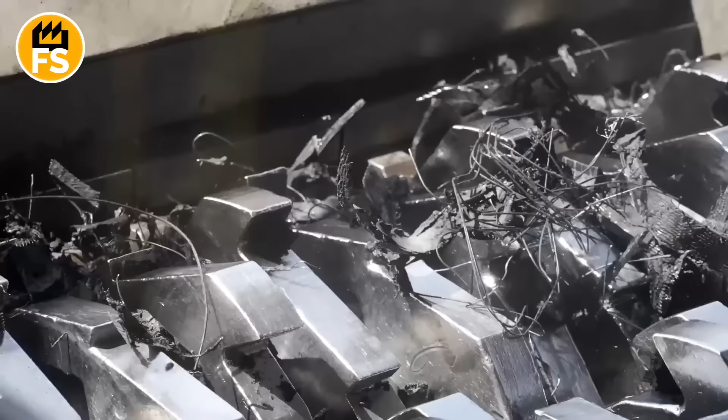Every year, over 1 billion new tires appear in the world, and just as many used ones end up in landfills. In the United States alone, over 250 million tires are recycled annually, saving the planet from mountains of trash. But where do these black rings, which have served their thousands of miles, disappear to?

They don't just vanish, they go through fire, steel, and the grindstones of machines to be born a second time. And the most exciting part, we don't even realize that we walk on their second life every day. Stay until the end, because there I will reveal a secret that will forever change your perception of an ordinary tire.

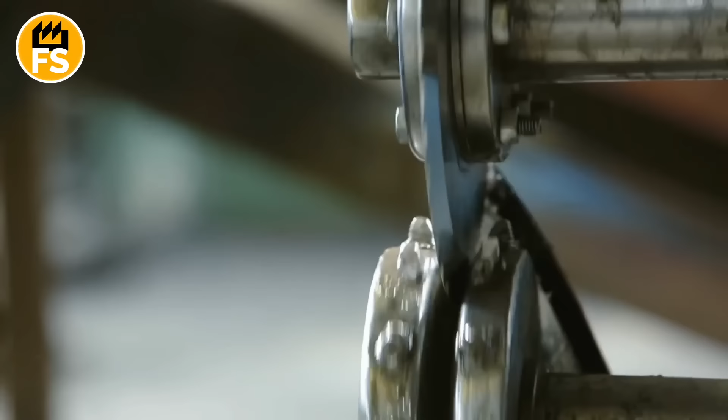So today, we're heading to a cemetery. A car tire cemetery. Acres of land, piled high with mountains of black rubber rings. These are the silent veterans of the roads, who have driven their thousands of miles and now lie here, seemingly unwanted by anyone. But this is not the end of their story. It's just the beginning of their amazing reincarnation.

We will trace how these worn, dirty pieces of rubber go through a series of brutal yet high-tech trials to be reborn as the soft, resilient heart of a modern sports stadium. This is a story of how the roar of the road turns into the quiet whisper under the feet of athletes.

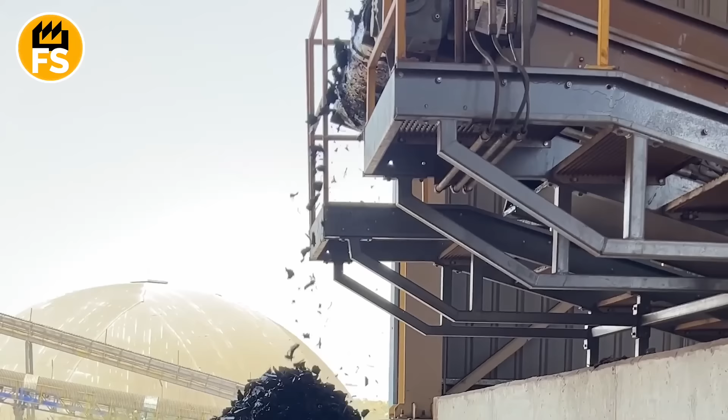Americans have learned to give a second life to the vast majority of tires. The recycling rate for old tires in the United States is now over 85%. This is one of the highest rates for any consumer product.

This means that over 250 million tires annually avoid the landfill and are sent for rebirth. Some of them are burned as highly efficient fuel. Some are used in civil engineering, but a significant and ever-growing number are turned into that very rubber crumb.

In this tire cemetery works a machine that looks like a steel Tyrannosaurus. This is an industrial shredder. A huge loader grabs a whole handful of old tires and throws them into the steel maw of this machine.

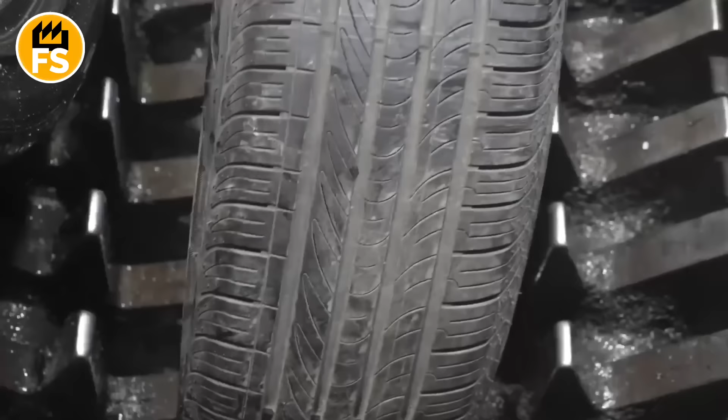Inside, 2 massive shafts with thick, sharp hooks rotate with a deafening screech. They grab the tires with relentless force and with an incredible crack, tear them into pieces. There is no delicacy here. The shredder's task is simply to break the integrity of the tire, turning it into coarse pieces the size of a palm. At this moment, the first important release occurs.

Inside each tire is a steel cord, a strong frame of steel wire. During the tearing, this cord is released, turning into a shiny web of steel threads, mixed with rubber pieces. This chaotic mixture of rubber and steel moves further along the conveyor.

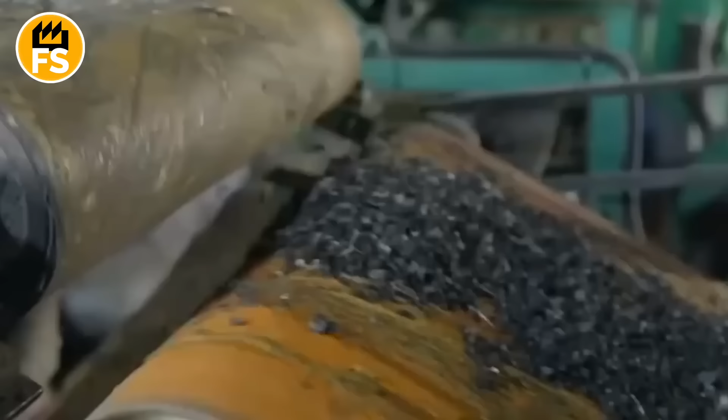And here, an industrial, powerful, huge magnet comes into play, rotating above the stream of shredded material. It, like a refrigerator magnet, but 1,000,000 times stronger, pulls all the steel threads from the rubber mass. With a screech and a clang, the steel cord sticks to the magnet and is dropped into a separate container. This steel will then be sent for remelting, and our cleaned rubber continues its journey.

But it is still too large and coarse. The next stop is the granulator. This is something like an enraged coffee grinder the size of a car. Inside, sharp knives rotate at a huge speed, grinding the large pieces into a finer fraction, the size of a fingernail.

During this process, another component of the tire is released, the textile cord. These are nylon or polyester fibers that gave the tire additional strength. These light, fluffy fibers need to be removed. For this, the rubber granules pass through a system of vibrating screens and air separators. Powerful streams of air literally blow away the light textile fluff, leaving only clean, heavy rubber granules.

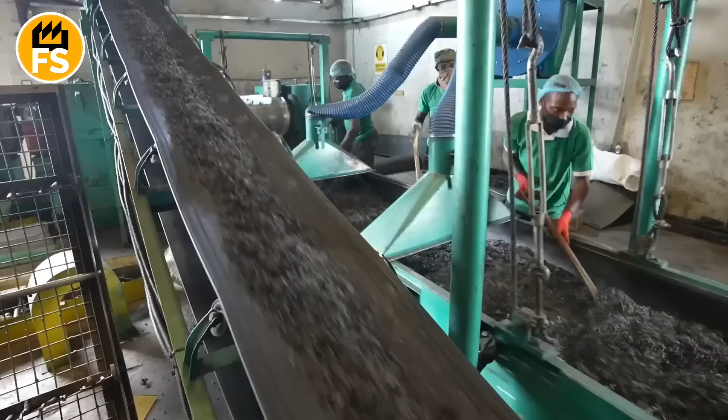Now, we have a clean, but still quite large material. To become a stadium covering, it needs to be turned into crumb. For this, the granules are sent for final grinding, often in so-called cracker mills. These are 2 massive grooved steel rollers that rotate towards each other at different speeds. The rubber granules, falling between them, are not so much cut as they are torn and ground into the smallest particles.

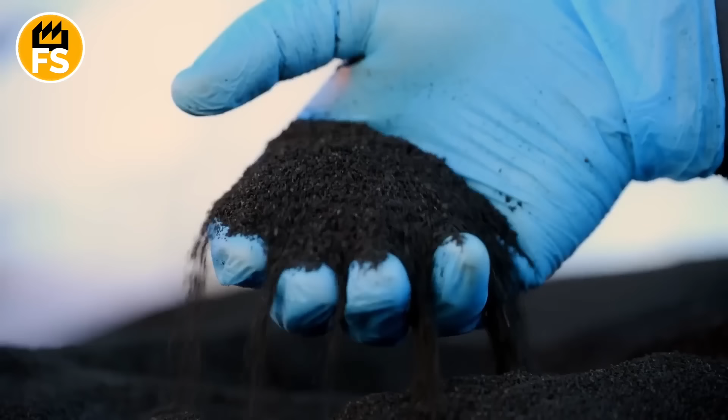As a result of this process, we finally get what it was all for: rubber crumb. This is a uniform, free-flowing mass, similar to black caviar or coarse sand, where the size of each particle is only a few millimeters. This crumb is carefully sifted to guarantee perfect size uniformity and packed into huge bags, weighing a ton each. Its journey from a dirty tire to a clean, high-tech raw material is complete.

And now let's move to the place where this black crumb will find its true calling, to the construction of a new stadium. Workers roll out huge rolls of artificial turf on a perfectly leveled gravel base. This isn't just a green carpet. It's a base with long, soft polyethylene blades of grass sticking up.

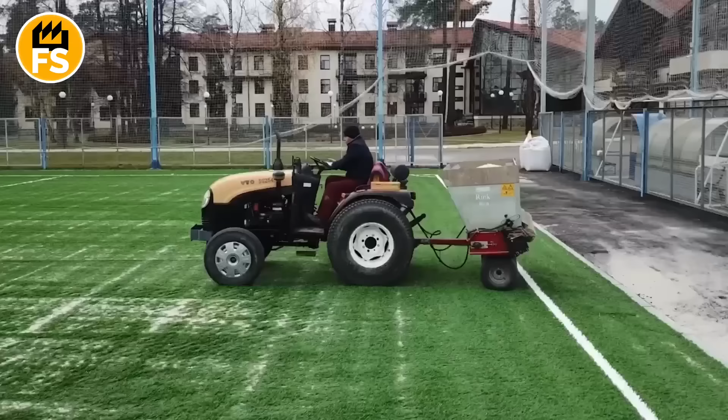But for now, they look sad and limp, pressed to the base. For them to stand up and look like real grass, they need support. And here, a special machine, similar to a large fertilizer spreader, drives onto the field.

A process called infilling begins. First, the machine evenly spreads a layer of fine, rounded quartz sand over the entire field. It is heavy and settles at the very base of the carpet, acting as a ballast so the turf doesn't shift, and helping to stabilize the blades of grass.

And following the sand, our main hero is poured onto the field: black rubber crumb. The machine just as evenly distributes it over the entire surface. And this is where the main transformation happens.

This crumb fills the space between the blades of grass, making them stand vertically, like real grass. Secondly, and most importantly, it creates a cushioning layer. When an athlete runs, jumps, or falls, this layer of billions of tiny, resilient rubber particles compresses, absorbing the energy of the impact.

It's like running on a billion tiny trampolines. This sharply reduces the load on the athlete's joints and makes falls much safer.

The final touch is combing the field. A special machine with a huge brush drives over the turf, thoroughly mixing the sand and rubber crumb and combing them deep to the very base, making each blade of grass stand perfectly straight.

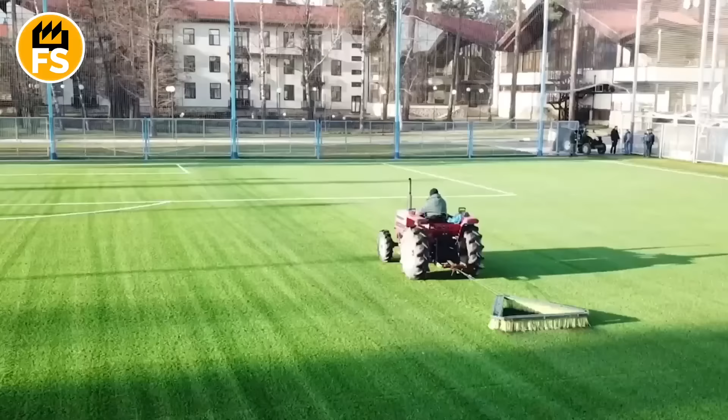And so, when the work is done, before us is a perfectly green, resilient, and safe field. And none of the players running on it may even guess that under their feet, between the bright green blades of grass, lie millions of particles of old car tires, which have completed their epic journey from the roar of the highway to the quiet, resilient covering of a sports arena, having received a second, much nobler life.

To create one standard field for American football or soccer, you need an average of 20,000 to 40,000 old passenger car tires. Just think about it. A single field completely eats a whole mountain of rubber trash.

And how many such fields are there in the country? There are now over 13,000 fields with artificial turf in the USA, in schools, colleges, parks, and professional arenas. And this number is growing every year.

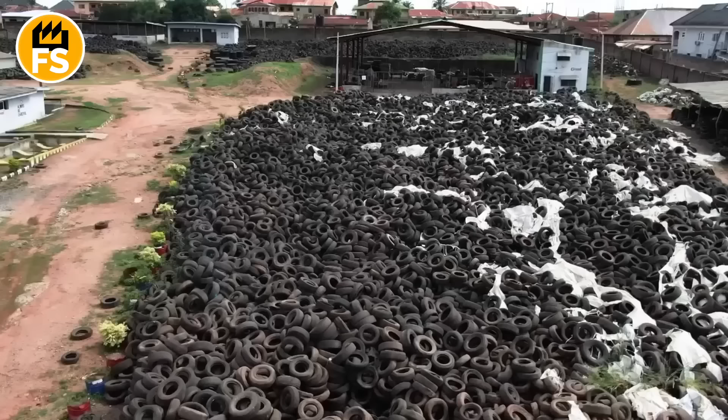And now for some simple math. If we take even the minimum figure of 20,000 tires per field, it turns out that in the coverings for sports fields across the country, over 260 million old tires have found their new home. This is almost a year's supply of all the rubber scrap that the country generates.

Natural turf is a very capricious thing. It needs to be constantly mowed, watered, fertilized, and given rest. On average, a natural field can withstand no more than 20 hours of play per week.

And a field with artificial turf? It can work 24 hours a day, 7 days a week, in rain and in heat.

And now about water. One field with artificial turf can save from 500,000 to 1 million gallons of water every year. This is the amount of water an average family uses in several years. Add to this the savings on fertilizers, pesticides, and the work of lawnmowers, and the benefit becomes obvious.

So the next time you see a bright green field, know that it's not just a place to play. It's a monument to human ingenuity that solves the problem of trash, makes sports safer, and saves precious natural resources, one old tread at a time.

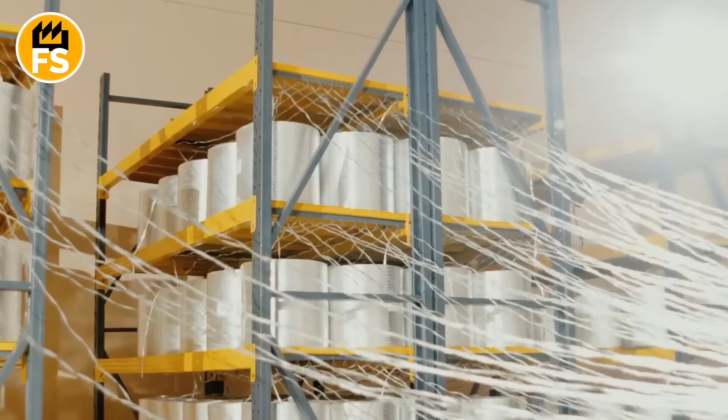Imagine thousands of glass threads, thin as a hair, combined into a single river, are transformed into a material that is already challenging steel. This isn't science fiction, but modern production of fiberglass rebar.

Every year, the world spends billions fighting rust, repairing bridges and parking garages destroyed by corrosion. But there is a solution: a composite that is twice as strong as steel, four times lighter, and doesn't even know what rust is. The market for this material is growing by 12% annually.

And today you will see how a building material of the future is born from hundreds of bobbins and a barrel of resin.

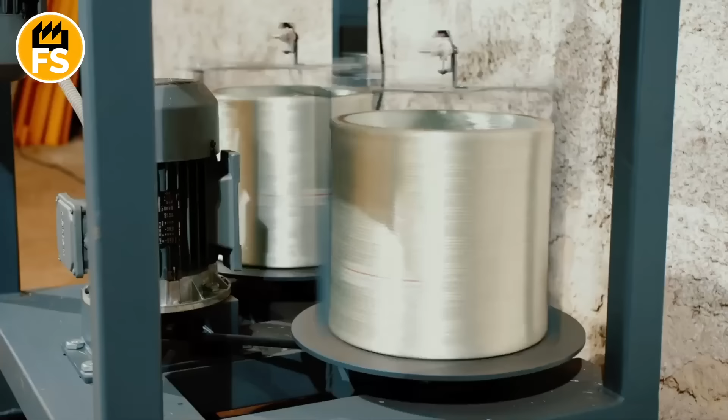It all begins at one end of a huge workshop, where a structure resembling a giant library for threads stands. This is called a creel. On a wall, several yards high, hundreds, sometimes thousands, of huge bobbins are installed in neat rows. On each of them is wound the thinnest glass thread, or roving.

This isn't the glass that windows are made of. This is a special fiberglass, produced by melting glass and drawing it through microscopic holes. The result is threads thinner than a human hair, but with incredible tensile strength.

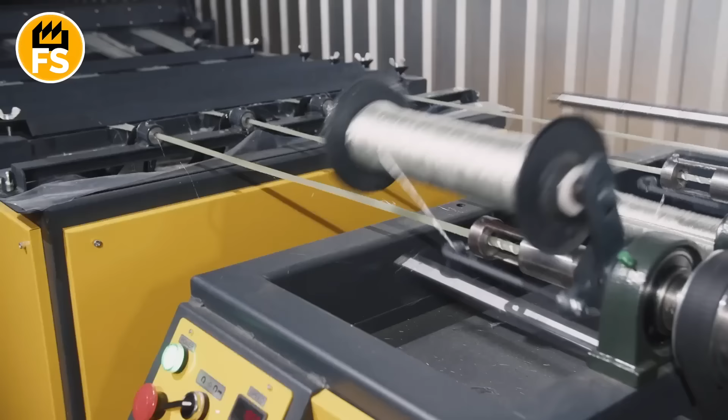They will be our skeleton, our internal army, which will give the rod its insane strength. From each of these hundreds of bobbins stretches its own separate thread, and they all gather into one thick, fluffy bundle. It's like thousands of streams merging into one large river. This dry white bundle is the soul of the future rebar.

Next, this river of fiberglass begins its journey. It passes through a system of guides and tensioning devices. This is a very important, though inconspicuous, stage. Each of the thousands of threads must be tensioned with the same force. If one thread sags and another is over-tensioned, the load in the final product will be distributed unevenly, and it will lose its strength. Therefore, the machine carefully aligns them, preparing them for the most important moment: baptism in resin.

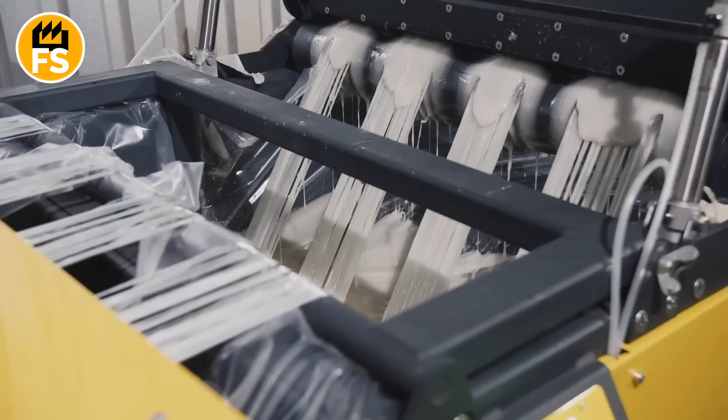The dry glass bundle is slowly immersed in a bath filled with a thick, sticky liquid, similar to honey or syrup. This is a polymer resin, our meat, that will grow on the glass skeleton. This is a complex chemical cocktail. The base is usually polyester, vinyl ester, or epoxy resin. A hardener is added to it, a catalyst that will start a chemical reaction and force the liquid to turn into a solid plastic.

Also, various additives can be added here: pigments to give color, ultraviolet inhibitors so that the rebar is not afraid of sunlight, and flame retardants for fire resistance. The task of this bath is to soak every, even the tiniest fiber. The bundle must be completely submerged in this resin so that not a single dry spot remains.

The soaked, heavy from sticky resin bundle comes out of the bath and heads to the point of its birth, the forming die. This is the heart of the whole process. Imagine a thick steel plate with a perfectly round, polished hole, the diameter of which exactly corresponds to the diameter of the future rod. The die is heated to a certain temperature.

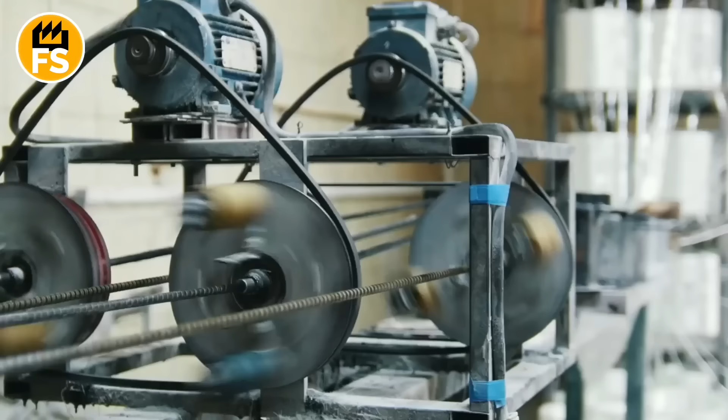When the wet bundle is drawn into this hole, several things happen at once. First, the die, like a press, squeezes out all the excess resin, leaving only the necessary amount. Second, it tightly compresses all the fiberglass together, forming a perfectly round rod. Third, the heat from the die starts the initial stage of the chemical reaction of hardening, or polymerization. The resin begins to turn from a liquid into a gel. At the exit of the die, we already see the familiar shape of the rod, but it is still soft and vulnerable.

But how does it get its famous ribbed surface to hold well in concrete? Immediately after exiting the die, while the rod is still hot and soft, a special bundle of the same fiberglass is wound onto it. A thin, resin-soaked thread is wound in a spiral on the surface of the rod, creating a relief pattern. Sometimes, for even better adhesion, fine quartz sand is sprinkled on the sticky surface, which sticks firmly to the resin. Now our rebar has not only strength, but also teeth with which it will hold onto concrete.

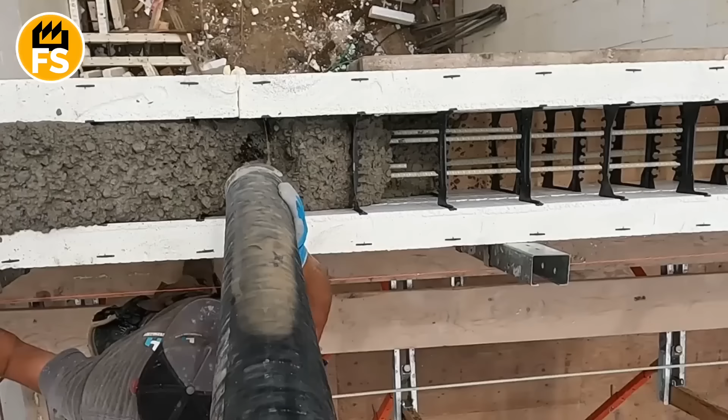The formed and wrapped rod enters the longest part of the machine, the curing tunnel, or polymerization furnace. This is a long chamber that can stretch for tens of feet, inside which a high temperature is maintained, usually 400 Fahrenheit. Here, the final transformation takes place.

This is not just drying. Under the influence of heat, the resin molecules begin to actively connect with each other, forming a strong, rigid, three-dimensional network. The liquid, sticky syrup turns into an extremely strong and hard composite material, which firmly binds millions of glass fibers into a single monolith. It's like baking a pie. While the rod slowly moves through this hot tunnel, it acquires its final, stone-like hardness.

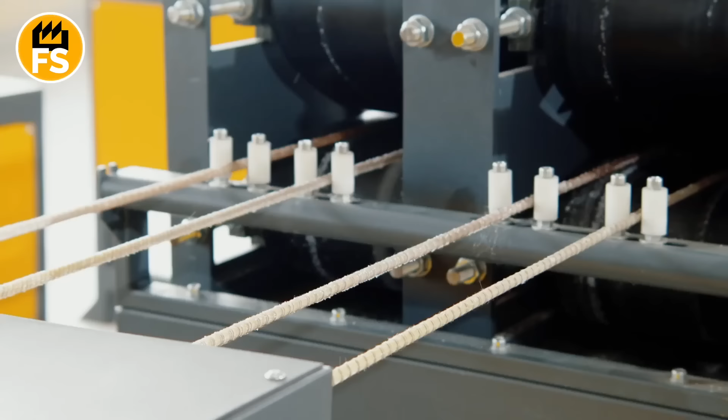But what pulls it through this whole long path, from the bobbins to the furnace? At the end of the line stands a special pulling device, which gave the whole process its name. Usually, these are two caterpillar mechanisms, similar to tank tracks, located one above the other. They gently but very firmly clamp the already finished hard rod with their rubber pads, and at a constant, precisely calibrated speed, pull it towards themselves.

It is they who create the force that pulls the fiberglass through the resin bath, through the forming die, and through the furnace. The speed of this movement is one of the most important parameters that controls the quality of the final product. And so, from the other end of this long conveyor appears an endless, perfectly even, hard and hot fiberglass rod.

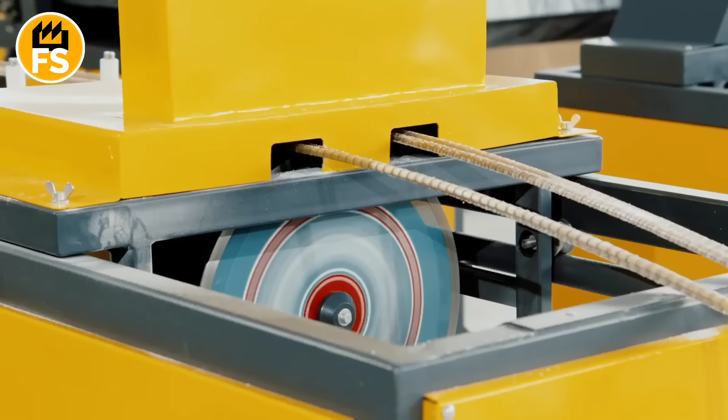The final chord is cutting. Across the line is an automatic saw. It synchronizes with the speed of the rod's movement, and at the right moment makes a quick forward movement, and with a sharp whiz, cuts off a piece of standard length from the endless ribbon, for example, 20 or 40 feet. Then it returns to its starting position, waiting for the next section to arrive.

The finished, still warm rods roll onto a cooling table, and then they are collected into bundles, tied, and sent to the warehouse. And so, before our eyes, thousands of fragile glass threads and a barrel of sticky liquid, having passed through baths, presses, and furnaces, have turned into a light but incredibly strong building material of the future, ready to challenge rust and time in the concrete jungles. The fiberglass rebar market is not yet a giant like the steel market, but it is the coolest and most daring newcomer at the party, rapidly gaining popularity.

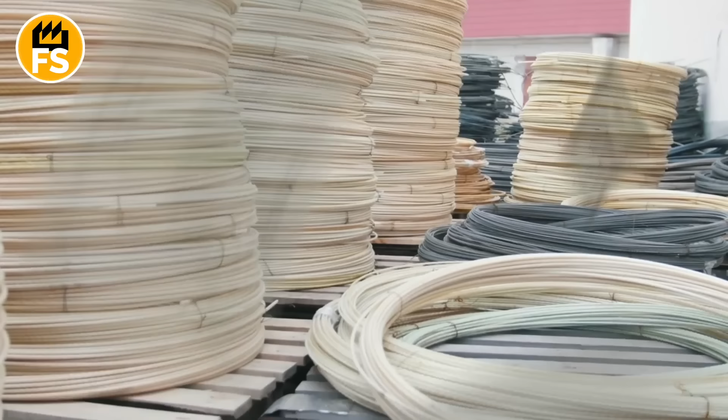The global market for this material is already valued at hundreds of millions of dollars, and the forecasts are simply insane. It is expected to grow by 10 or 12% annually. This means that more and more engineers and architects are looking at rusting steel and saying, 'Dude, we can do better.' And now about the main features that make steel rebar nervously smoke in the corner.

The first and most obvious is weight. Fiberglass rebar is about 4 times lighter than steel of the same diameter. Sounds boring? Now imagine it in real life. Imagine a truck carrying rebar to a construction site. It can bring 4 times more length of fiberglass rebar in one trip than steel, because it is limited by weight. Or, for the same amount, it will take 4 times fewer trips, which saves fuel and time.

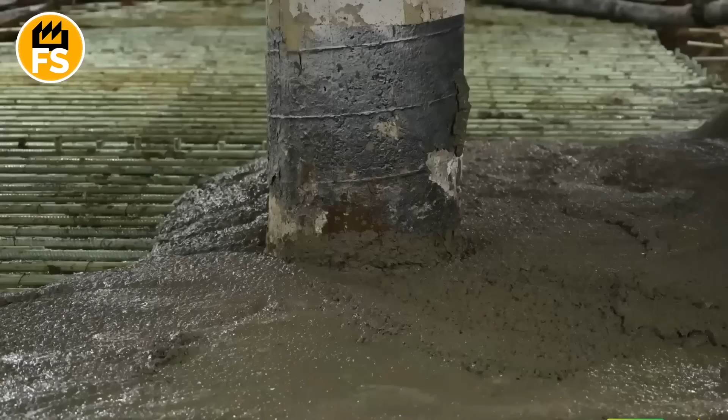On the site itself, 2 workers can calmly carry whole coils or bundles of fiberglass rods, whereas a crane is needed to move steel. This is a colossal saving on logistics and labor.

Second is strength, and here fiberglass simply enters the ring and knocks out steel in the first round. Its tensile strength is about twice as high as that of standard steel rebar. So to break a fiberglass rod, you need to apply twice as much effort as for a steel one of the same diameter. This means that in some structures, rebar of a smaller diameter can be used, saving even more weight and volume. It's like comparing an ordinary rope with a climbing rope. At a smaller thickness, it withstands much greater loads.

But the main trump card, the real superpower of fiberglass, is its war with rust. The main enemy of any reinforced concrete structure, from bridges to parking garages, is not the load, it's rust. Water and salts penetrate through micro cracks in the concrete, reach the steel rebar, and it begins to rust. Rust increases in volume and literally tears the concrete from the inside. Annually, the United States spends billions of dollars on repairing bridges, parking garages, embankments, and tunnels destroyed by rebar corrosion.

And fiberglass? It just laughs in the face of rust. It is chemically inert, completely indifferent to water, salt, acids, and alkalis. This means that the service life of the structure increases dramatically. A concrete structure reinforced with steel is designed for more than 50 years. And a structure with fiberglass rebar is calmly designed for more than 100 years.

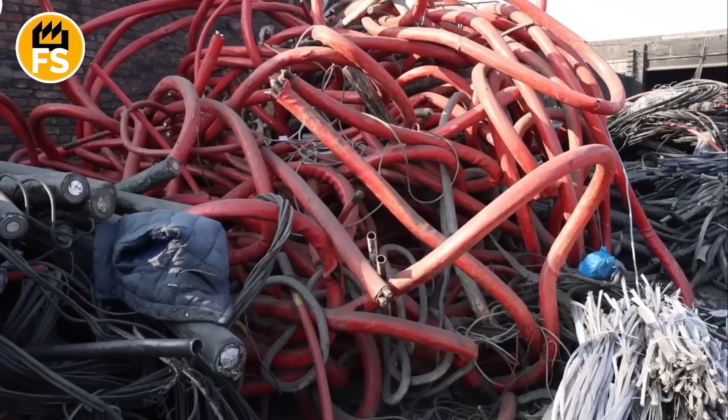It all starts at the huge warehouses of recycling plants. Thousands of pounds of various copper scrap flock here. Thick power cables from industrial sites lie next to thin wires from household appliances. Old transformers are neighbors with remnants of construction wiring. Each element has its own story, but they all share one thing: they are ready for a new life.

The first stage of recycling is careful sorting. Experienced specialists separate the scrap by type and degree of contamination. Clean copper wire is separated from insulated cables. Thick industrial cables are separated from thin household wires.

This is a critically important step, as different types of scrap require different approaches to recycling. The next stage is mechanical cleaning, a true art of modern technology.

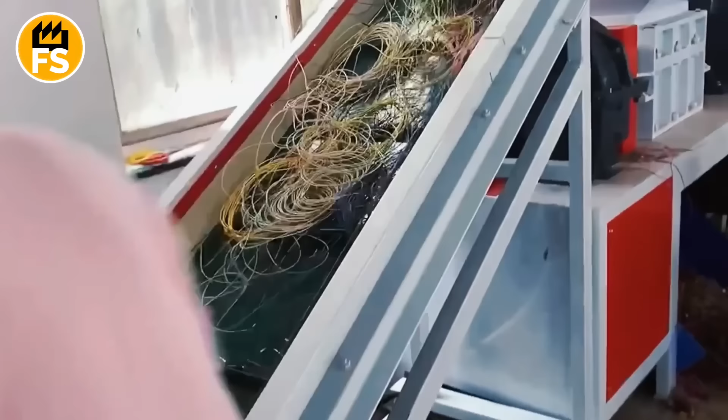Powerful shredding machines cut the cables into fragments 2 or 3 inches long. Special separators use the difference in material density, as copper is heavier than plastic and rubber, making it easy to separate. Vibrating tables and air currents finally clean the copper fragments of insulation remnants. The output is relatively clean copper pieces, but this is just the beginning.

The real magic begins in the melting shop. Huge induction furnaces heat the copper to a temperature of over 1,984 degrees Fahrenheit, the melting point of copper. The metal fragments gradually turn into a red-hot, almost golden liquid.

This sight is always impressive. Hard, cold pieces of metal become a living, pulsating mass. But temperature is just a tool. The main action happens at the molecular level.

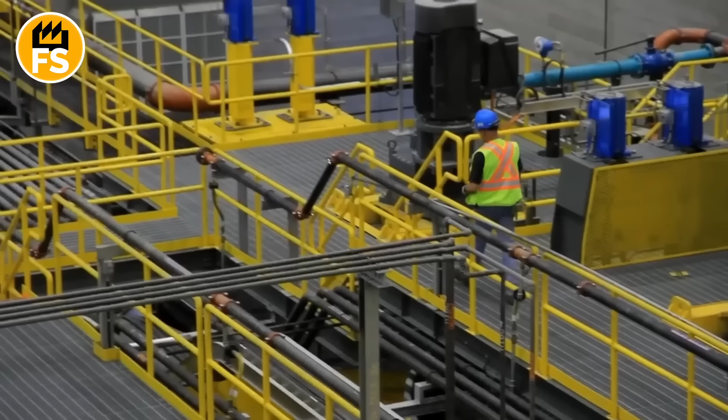During melting, impurities behave differently. Some float to the surface as slag, others dissolve. Master metallurgists carefully control the process, skimming off the slag and adding special substances called fluxes, which help remove unwanted elements. The first refining is complete, but this is not the end.

The molten copper is poured into special baths for electrolytic purification. This is the most precise stage of the entire process. An electric current of several thousand amperes is passed through the melt. Under its influence, residual impurities—iron, nickel, zinc, lead—migrate to the electrodes and are removed from the melt.

Electrolysis lasts for several hours. The temperature is strictly controlled between 2,100 and 2,200 degrees Fahrenheit, and the current strength is regulated with an accuracy of tenths of an ampere.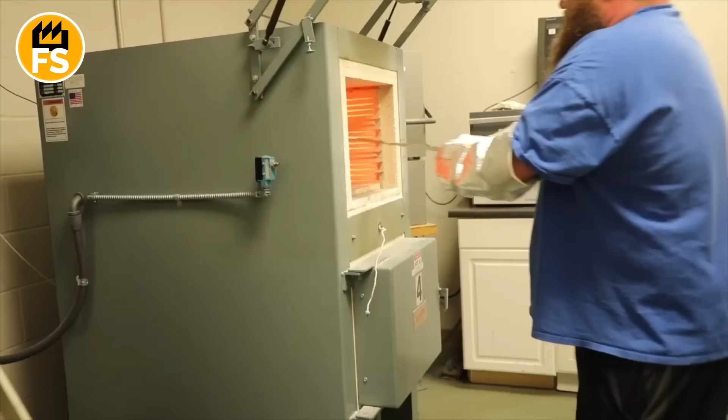Laboratory analyses are conducted every 30 minutes. Chemists check the metal's composition, tracking how the amount of impurities decreases. Gradually, the purity of the copper increases: 95%, 97%, 98%, 99%. And finally, the coveted mark of 99.9% is reached.

The purified copper is ready for forming. The molten metal is poured into special molds, ingot molds. The molds are preheated to a temperature of about 1,800 degrees Fahrenheit to avoid thermal shock. Slow, controlled cooling allows the copper to crystallize with the correct structure.

Perfectly uniform ingots weighing from 50 to 100 pounds, or cylindrical billets 6 or 8 inches in diameter, are formed. These billets are the basis for future cables. They go to the wire drawing shop where the next transformation takes place. A wire drawing machine is a series of successively arranged dies, openings of different diameters.

The billet passes through the first opening, about 3 inches in diameter, then through a smaller one of 2 inches, then 1.5 inches. With each pass, the diameter decreases and the length increases.

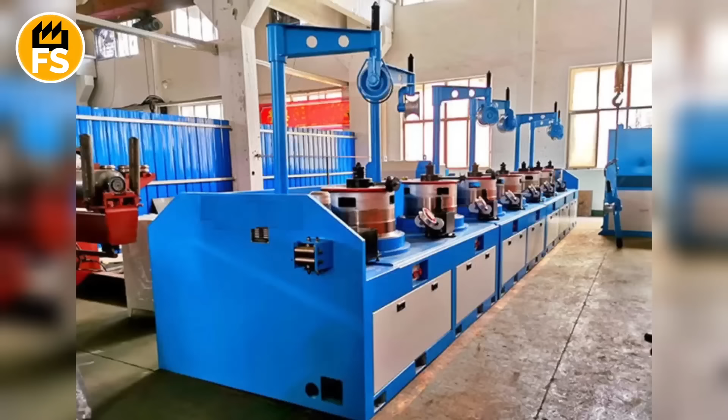The drawing process requires enormous effort. Powerful electric motors with up to 500 horsepower pull the copper through the dies with a force of tens of tons. The metal deforms but does not break because copper is plastic and can withstand such a load. Gradually, the thick billet turns into a thin, flexible wire with a diameter from 1/2 inch to even thinner.

Each stage of drawing is strictly controlled. The diameter is measured by laser devices. The feed speed can reach 100 feet per minute and is automatically regulated. If defects appear, such as scratches, irregularities, or cracks, the process is stopped for correction.

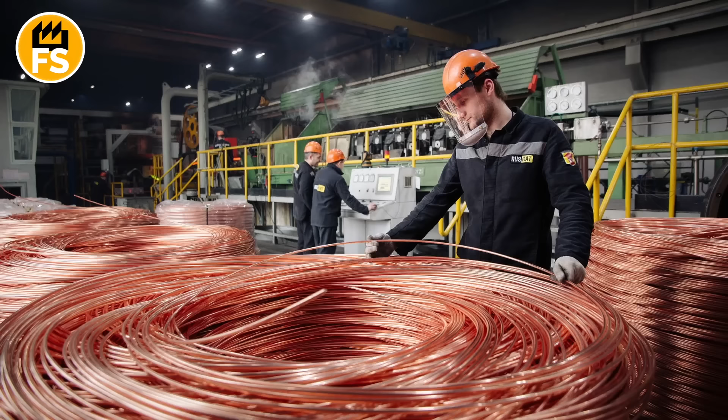The finished wire undergoes a final quality control. Not only the geometry is checked, but also the electrical properties. The resistance must not exceed a certain value per 1,000 feet of length. Conductivity, mechanical tensile strength—all parameters must comply with strict American Society for Testing and Materials standards.

After all, this wire will become the basis for cables that will transmit electricity to homes, offices, and factories. The final stage is the manufacturing of the finished cable. Copper wires are covered with insulation up to 1/10 of an inch thick, using polyethylene, polyvinyl chloride, or other modern materials.

Depending on the purpose, the wires can be twisted into the required configuration. Power cables for 120 or 240 volts, information cables of category 5 or 6, special purpose cables—each has its unique design. Packaging the finished product is the final touch.

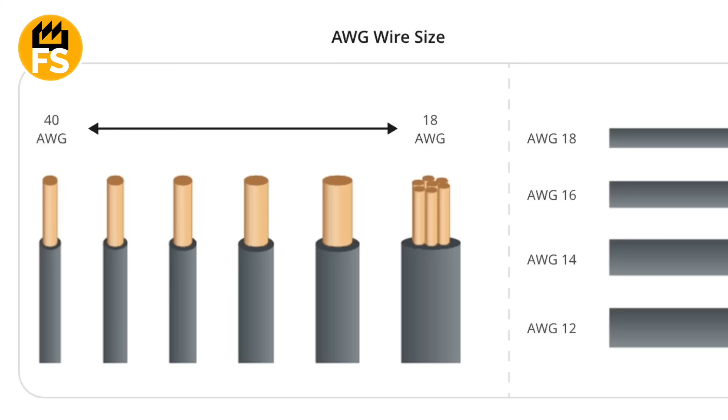Cables are neatly wound onto spools, 3 or 4 feet in diameter, or placed in boxes of standard sizes. Each unit is marked, indicating the length in feet, the cross-section in American wire gauge, and technical specifications. Underwriters Laboratory certificates confirm that the product meets all American safety standards.

The result of this complex technological symphony is impressive. From scrap that seemed like useless junk, high-quality cable is born. It is ready to serve for 25 or 30 years, providing reliable transmission of electrical energy from residential buildings to large industrial complexes. But this is not just a technological process—it is a philosophy of sustainable development in action.

Every ton of recycled copper is a ton that does not have to be mined from the Earth's depths. It means conserved natural resources, less environmental impact, and a cleaner environment for future generations. Recycling 1 ton of copper saves about 2.5 tons of ore. The cycle is complete, but it is endless.

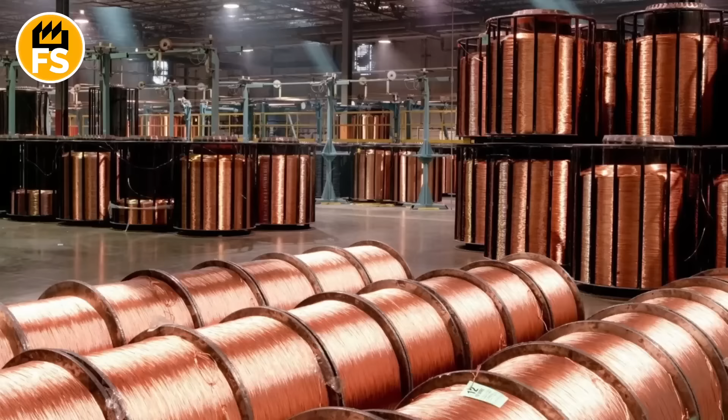When, decades from now, this new cable becomes obsolete again, it will return here to begin a new journey of transformation. Copper is the metal of eternity, which can be recycled an infinite number of times without loss of quality. And in this lies its true value.

1 million pounds of recycled copper saves enough energy to power 1,000 homes for a year. This is 85% less energy than is needed to mine new copper from ore. Recycling also reduces carbon dioxide emissions by 65% compared to primary production.

The largest amount of copper scrap comes from the construction industry, that's 31%, from electronics 21%, and from the automotive industry 12%.

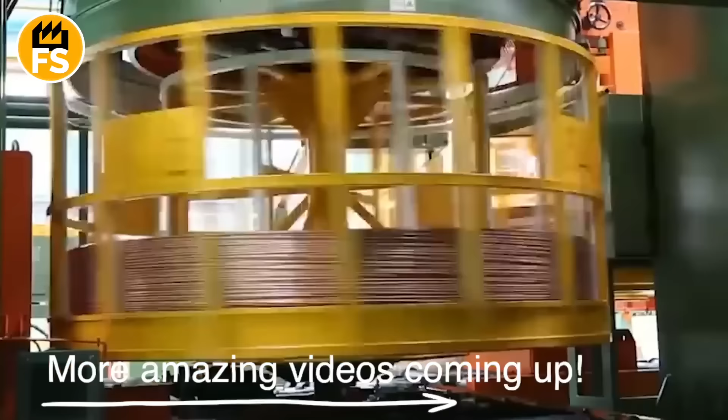1 pound of copper wire can be drawn to a length sufficient to wrap around a football field 23 times. Modern factories can process up to 400 tons of copper scrap per day, producing wire with a total length of over 50,000 miles. Over the last decade, the price of copper scrap has increased by 180%, making its recycling extremely profitable. Today, recycling provides 40% of the world's copper needs, and this figure continues to grow.

Every hour, over 3,000 miles of electrical cables are laid worldwide. But few people know that this involves gigantic metal spools, each one an engineering marvel weighing over 20 tons. Their diameter can reach 33 feet, and inside, up to 37 miles of wire capable of transmitting hundreds of thousands of volts. A half-inch error, and everything goes down the drain in losses.

How are these steel giants created with precision down to 1/100th of an inch? And why can't any power transmission line exist without them? Watch, and you'll be amazed.

This story begins with calculations. Before the first bolt touches the steel, a team of engineers dives into mathematical alchemy. Each spool for a high-voltage power transmission line is created for a specific type of cable, so there are no trifles here. Blueprints, models, and calculations come into play.

It is necessary to consider the outer diameter of the cable, for example 2 inches, its weight, which can exceed 3 pounds per foot, density, number of turns, winding angle, and even the insulation's coefficient of friction. On average, up to 6 miles of cable are wound onto one spool. That's almost 32,000 feet of heavy, multi-insulated wire that, under voltage, can carry hundreds of thousands of volts.

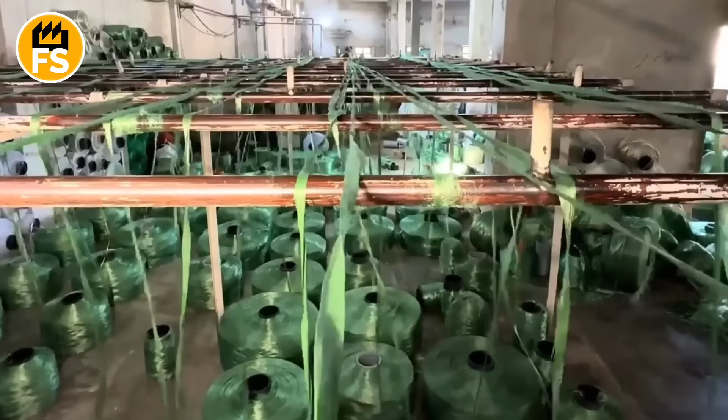An error of just half an inch in the spool's diameter, and the cable might start coiling incorrectly, shifting, compressing, overheating. In the worst case, it gets damaged even before installation. And that's tens of thousands of dollars in losses before even starting.

Moreover, the core diameter of the spool can reach 5 or 6 feet, and the total diameter of the flanges up to 33 feet. The weight of the structure exceeds 40,000 pounds. That's like 2 large SUVs, screwed together and stood upright. And this entire mass has to rotate smoothly, without misalignment or vibrations. Are you impressed? Because I sure am.

To avoid disasters, engineers add a coefficient of material expansion, as metal changes size when heated, consider transport weather conditions, and also the winding geometry, because even too steep a winding angle can damage the cable when it's unwound.

When the drawings are approved, giant workshops come onto the scene, hangars the size of a football field. Here, metal flanges, cores, and frames appear. Most often, the spools are made of steel. It's steel that can withstand the weight of the cable and the loads during transport.

For an average spool, more than 2 tons of steel are needed at the laying site. So, each giant spool for power transmission lines starts with cold metal, thick steel sheets that arrive at the factory as plates measuring 6 by 12 feet or more. Their thickness ranges from half an inch to 1 inch, and this steel is structural. Strong, tough, capable of withstanding high loads without cracking or deforming.

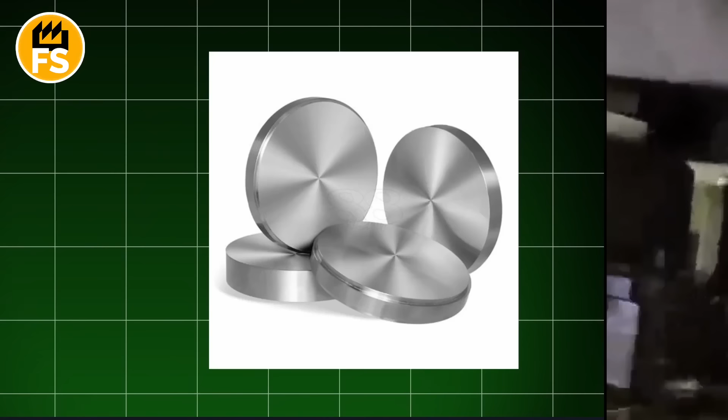First, the sheets are fed to plasma or laser cutting machines, which are programmed according to precise drawings. A giant plotter, emitting a hot beam, literally burns complex shapes into the metal. These machines operate with an accuracy of 1/100th of an inch.

Such precision isn't for beauty's sake, it's critical. Even the slightest error on one flange can cause the spool to lead the cable off-center during rotation, risking misalignment, jamming, and failure during installation.

The discs for the flanges are cut in pairs, identical rings 20 to 33 feet in diameter, with holes for connecting bolts. Technical slots and markings for future reinforcing elements are made on the surface right away. After cutting, they are processed by grinding machines.

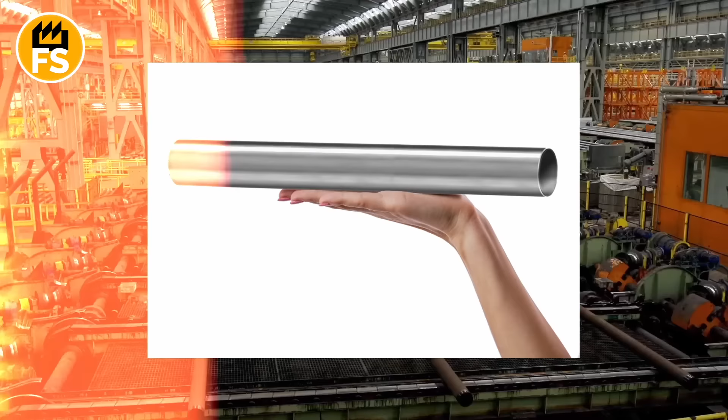Burrs are removed, and they are prepared for welding. At the center of the future spool is the core, a large steel pipe that will serve as the drum for winding the cable. Usually, its diameter is from 5 to 8 feet, and its length up to 10 or 16 feet.

The pipe is cut from thick rolled stock and reinforced with stiffening ribs inside—thick steel strips that form a frame and prevent the pipe from sagging under the weight of the cable. After all the parts of the future spool are cut, the stage where every millimeter matters begins: welding and assembly. Here, metal geometry transitions from 2-dimensional to 3-dimensional.

Two giant flanges are attached to both sides of the core, a steel pipe that will hold tens of thousands of feet of heavy cable. The entire structure must withstand not only its own weight, but also dynamic loads during rotation and transport.

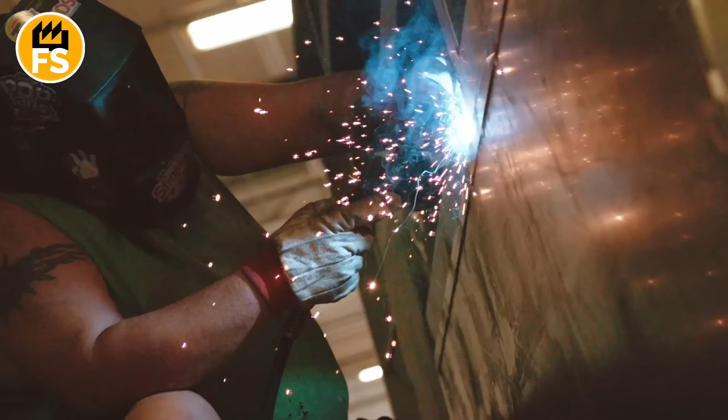Welding is done manually or automatically, depending on the size and complexity. Most often, submerged arc welding is used, which allows for creating dense, strong seams without voids. The joints are additionally ground, as any protrusion or unevenness can damage the cable during winding.

Then, reinforcement. Stiffening ribs, which are thick steel plates placed inside the core and at the joints with the flanges, are added to the structure. They prevent deformation under pressure. To fix all the parts, bolts up to 1.5 inches in diameter are used, tightened with special hydraulic torque wrenches. One such bolt can withstand a load of tens of thousands of pounds.

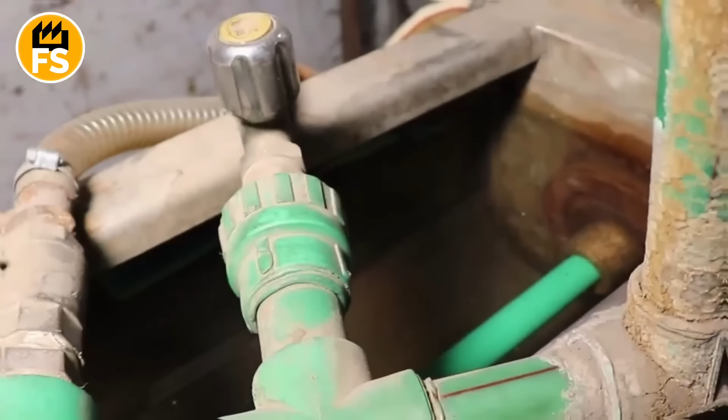The finished spool is installed on a temporary axle and rotated. Engineers check the balance using a laser level, ensuring that during rotation, no part shifts even a quarter inch. If the structure wobbles, it's ground, adjusted, and sometimes parts of the elements are reassembled. Only after this is the spool considered ready for the final stage: anti-corrosion treatment, painting, and testing.

The finished spool has just been removed from the rotating stand after welding. It's still warm, smells of metal and ozone, and its surface is covered with dark gray spots. That's scale. It looks like a thin crust, similar to coal dust, and remains after the metal comes into contact with high temperature. Along with it, small remnants of oil, dust from grinding, handprints.

Painting in this state is a waste of time. The coating won't stick, it will peel off in the first few months. So first, mechanical cleaning takes place. The workshop buzzes with tools.

Workers with stiff brushes on grinding machines go over the joints, flanges, and stiffening ribs. They remove rough irregularities, clean the seams of residual slag. But this is not enough.

Next, a sandblasting unit comes into play. A large chamber, or just a separate section in the workshop. The spool is brought inside on a special platform. Then, the roar of a compressor and a stream of fine abrasive starts hitting the steel surface under high pressure. Sometimes quartz sand, sometimes steel balls. It sounds like a storm of hail hitting tin.

The surface changes before your eyes. Where there was just dark mottling, now there is an even, matte gray metal with a slight roughness. If you run your finger over it, you feel not smooth, but slightly velvety to the touch. This is exactly what's needed, because this micro-roughness significantly improves adhesion with the anti-corrosion primer. In chemistry, this is called the anchor profile effect.

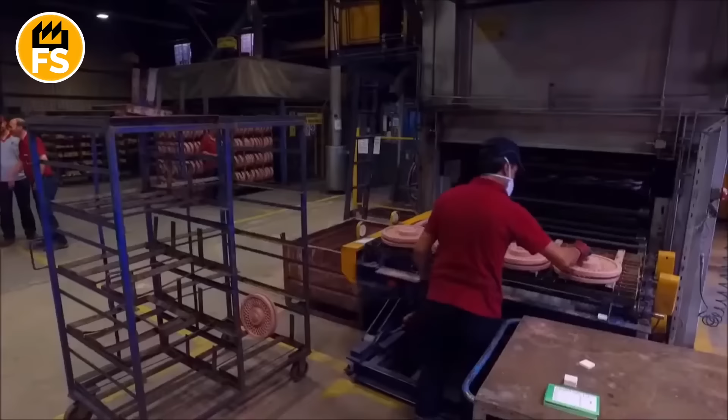When the treatment is complete, the entire surface is blown with air, blowing out residual abrasive from corners and crevices. This is the perfect moment to apply an anti-corrosion primer, the first protective barrier between the metal and the environment. A worker in a mask and protective suit takes a sprayer with a thick gray liquid, a zinc-rich primer.

With each press of the trigger, a thin, even mist comes out of the nozzle, settling on the surface. The zinc in the primer acts as a sacrificial metal. It is the first to react with moisture, saving the steel from corrosion. After a few minutes, the spool is already covered with a thin, almost invisible layer. It looks a little lighter, as if dusted.

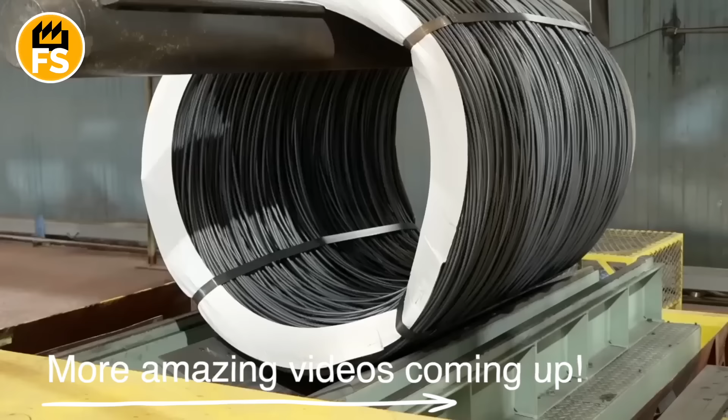In a few hours, this primer will polymerize and form a chemically resistant film that is firmly bonded to the metal. It is this layer that takes the first hit from time, moisture, and temperatures. For export or harsh climatic zones, additional layers may be applied: marine varnish, hydrophobic films, or even heat-resistant coatings that can withstand heating up to 300 degrees Fahrenheit.

When the coating dries, the spool is carefully inspected. Under ultraviolet light, all microcracks, bubbles, or gaps in the layer are visible. If there are doubts, an electric spark test is performed: a special probe glides over the surface, and a spark jumps only where the insulation is compromised. This ensures that every inch of metal is reliably protected and will withstand years of operation in any conditions.

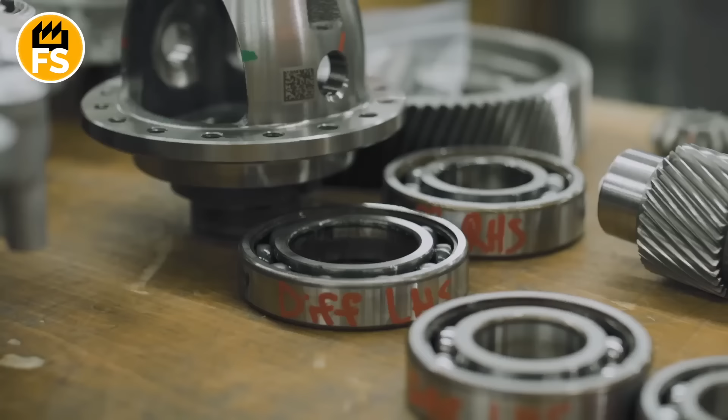Every year, over 300 million electric motors are manufactured worldwide, from miniature ones that spin coolers in laptops to giants that power trains, factory lines, and mine elevators. And each one of them is not just a coil of wires and iron, but a complex system of dozens of precisely calibrated parts. How is the heart of a machine born? Why is winding similar to weaving, and balancing to jewelry making? And how does one spark power a rotation that will last for thousands of hours? Let's take a look behind the scenes of one of the greatest technical processes, the creation of an electric motor.

Inside every electric motor is a true mechanical electrical universe. The main components of a motor are the stator, rotor, shaft, bearings, housing, as well as a cooling system and terminal box. The stator is the stationary part, located in a circle inside the housing. It's what creates the magnetic field that makes the rotor spin. Inside the stator is a core made of layers of thin electrical steel, which reduces losses from eddy currents.

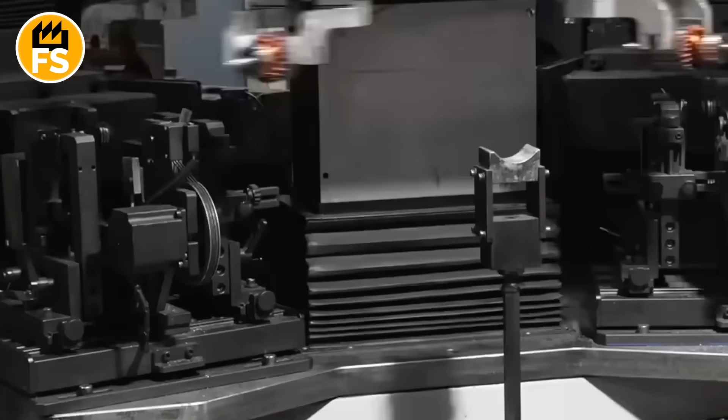In the slots of the core is a winding of copper wire, connected in a special way to create a rotating magnetic field. The rotor is the moving part inside the stator. It either has its own winding or is made in the form of a squirrel cage: aluminum bars cast into a steel core, which form closed current loops. When the stator's magnetic field interacts with the rotor, it starts to rotate.

The shaft is a rod that passes through the rotor and extends outside the housing. It's on this shaft that pulleys, impellers, reducers, or other drives are mounted. It transmits rotation to the mechanisms. The shaft must be precisely centered. Otherwise, the motor will vibrate and wear out quickly.

Bearings, usually two, one at each end of the shaft, ensure smooth rotation with minimal friction. For reliability, they are lubricated with special greases or are sealed. The housing protects the internal elements from dust, moisture, and mechanical damage. It often has fins for heat dissipation or even a fan. The material is cast aluminum or cast iron, depending on the power and purpose of the motor.

The cooling system is most often simple air cooling: a fan on the shaft drives air flows through the housing. In large industrial motors, liquid cooling or external air circulation through special channels is used. The terminal box is on the outside of the housing. This is where the power cables are connected to the stator winding. Inside are contacts, clamping screws, and sometimes temperature sensors.

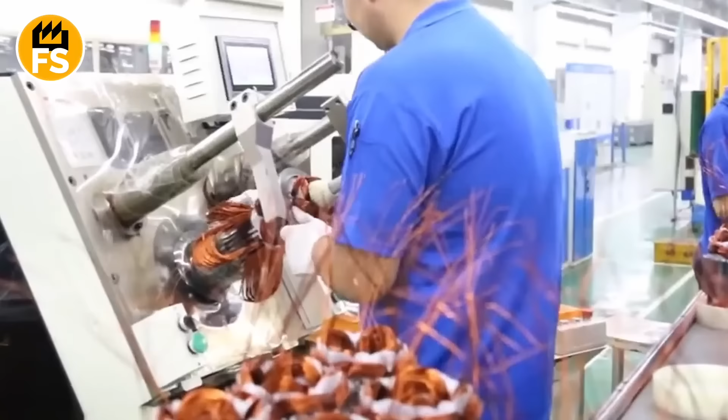In the depths of the factory, in a workshop that smells of varnish, metallic dust, and warm insulation, stands a giant stator, a stationary ring with slots around its circumference. This is its core, made of thin steel sheets, tightly pressed together. In each slot of this ring will lie copper wire, carefully laid, loop by loop, turn by turn, because whether the motor will rotate at all depends on this.

Before starting the winding, the stator frame is thoroughly prepared. The slots are lined with special insulating liners, like nests for the wire. These are materials that withstand high temperatures, vibrations, and electrical loads. Only when they are sure that the insulation is perfect is the winding machine started.

The machine, resembling a giant spool that unwinds copper wire from a bobbin, wraps it around guides and lays it in the slots. Everything is automated, but under the supervision of a specialist. One sharp movement, and the wire could lay with a kink or snag the insulation, and that's a potential short circuit.

For powerful or non-standard motors, winding is done by hand. A worker inserts the wire in a loop, pulls it through with a tool, presses it to the bottom of the slot, secures it, and tightens it. The work is similar to weaving, but with shiny copper and immense responsibility. Each coil, and there are dozens of them, must be identical, symmetrical, and correctly oriented.

After the first layer of winding is completed, interphase insulation is laid, and then the second layer is placed. The wire forms closed loops, phases, which are then connected in a star or delta configuration, depending on the motor's setup. Then the wires are secured with strings or plastic fasteners, the tension and geometry are checked, and adjusted by hand if necessary. Finally, impregnation with varnish or epoxy resin ensures nothing shifts even a micron under vibration and temperature under load.

If the stator is the skeleton, then the rotor is the muscle. It moves, rotates, creates torque. It's not visible when the motor is running, but it's what drives everything, from a fan to a train. At the core of the rotor is a steel shaft, long and powerful. Around it, the core is mounted, a set of thin electrical steel sheets stacked into a cylinder. The sheets have slots for the conductors. This is where the most interesting part begins: creating the winding that will make the rotor come alive.

One of the most common options is the squirrel cage. Aluminum or copper bars are inserted into the slots, and both ends are cast into rings, like a hoop around a cage. This creates a closed current loop. Such a design doesn't need to be connected directly. Current is induced inside automatically as soon as the motor starts. It's a simple, reliable, and mass-produced option for industry.

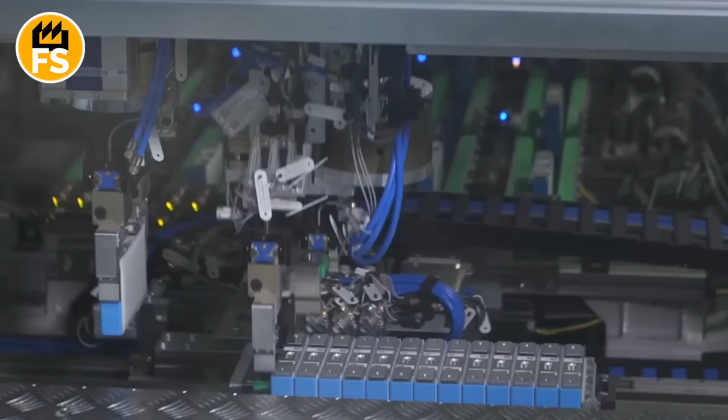But if the motor is more complex, more powerful, then classic windings are used. A worker manually lays copper wire in each slot, carefully tightening it, bending it at an angle. Here, symmetry, precise geometry of the turns, and perfect insulation are important. The wire must lie right, not touching the metal anywhere, not crossing over, not being too tight or too loose. A mistake, and the motor will overheat or fail.

The rotor windings are then connected in a specific sequence: star, delta, or another type of connection. Everything is secured, insulated, and sometimes varnished. The insulated ends are led out to slip rings or brush assemblies, depending on the design. After this, the rotor is balanced, as it has to rotate at speeds of thousands of revolutions per minute. Any extra 100 grams on the edge, and everything will vibrate, hum, and heat up.

The result? A compact, shiny cylinder with windings of copper wire or closed bars. It will be inserted into the stator, and the magic of converting electricity into motion will become possible.

It all starts with checking dimensions and tolerances. The gap between the rotor and the stator, the so-called air gap, must be very small. If it's too narrow, friction will occur. If it's too wide, the magnetic field will be weak, and the motor will lose efficiency.

The rotor is mounted inside the stator via bearing assemblies. Sometimes special guides or hydraulic presses are used for this. The rotor shaft must rotate perfectly straight, otherwise everything will vibrate or break down within a week. At the ends of the rotor shaft, sleeve or rolling bearings are installed. They allow the rotor to rotate without friction. The bearings are placed in so-called end shields, which are then attached to the motor housing.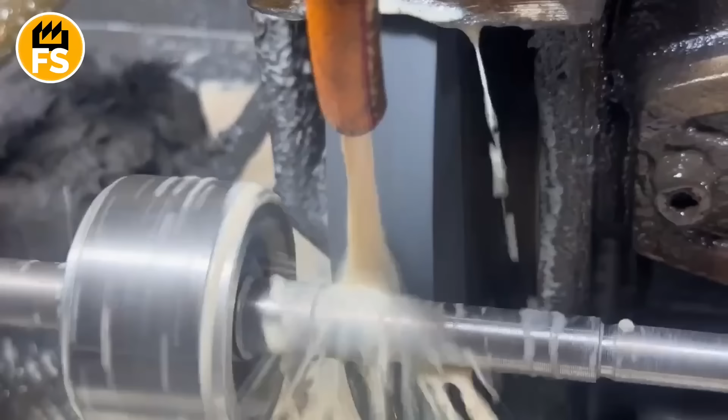All surfaces are pre-lubricated with special greases to ensure durability. The ends of the stator and, if necessary, rotor windings are led out to the terminal box. Here they will be connected in the required circuit, star, delta, or another. In complex motors, temperature sensors are installed to detect overheating before a failure occurs.

The motor is now assembled, stator and rotor in the housing, wires connected, bearings in place. But it's too early to start it. First, varnishing, drying, balancing, and testing. All like a ritual before the birth of a real machine's heart.

In a spacious room with a specific smell of epoxy resin, the stator windings, and sometimes the rotor, are coated with electrical insulating varnish. This isn't just for dust protection. The varnish strengthens the structure, secures the wires so they don't vibrate at high speeds, and prevents moisture penetration. Application is either by dipping in a bath or by spraying. The motor is completely submerged in a tank of varnish, then removed and left to drain off the excess.

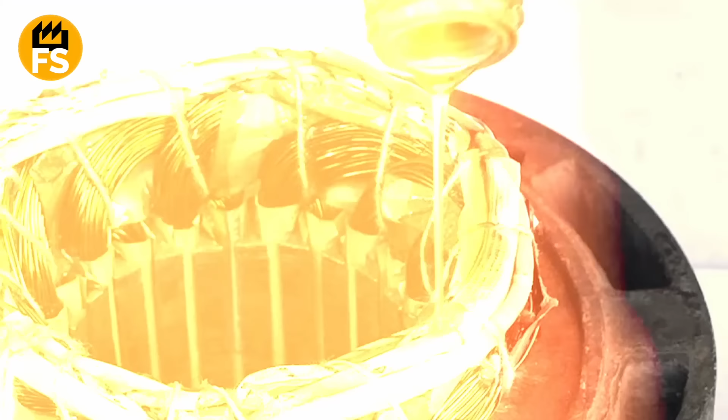Next is drying in a thermal chamber at a temperature of 250 to 300 degrees Fahrenheit. This stage resembles baking. The varnish polymerizes and forms a hard protective film. After varnishing, the most sensitive stage, the motor is installed on a balancing stand. The system is like a huge record player. The motor rotates at high speed, and sensors detect the slightest deviations. Even a few grams of excess mass on the rotor can cause vibration that will destroy the bearings, shorten the service life significantly, or even ruin the motor.

To eliminate the imbalance, engineers drill microscopic holes in the heavier part of the rotor, removing excess metal. This is almost a jeweler's craft.

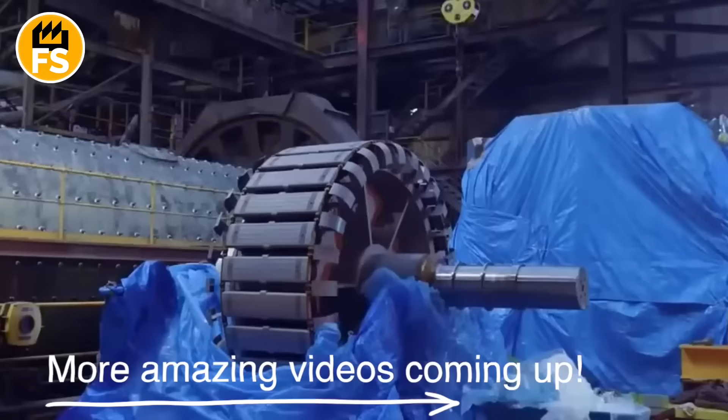The finished motor is sent to the test stand, where it comes to life for the first time. It's connected to a power supply. Rotations, noise, heat, and current consumption are recorded, and efficiency and power are measured. Everything is documented, the motor's passport contains dozens of parameters.

If the motor passes all tests, it's packaged, a seal is applied, and an instruction manual is added. And very soon, this motor could be working on a conveyor, in an elevator, or in an electric train, wearing down metal and converting current into motion, without rest for tens of thousands of hours.

Every year worldwide, over 200,000 miles of steel wire are produced, enough to wrap around the Earth more than 8 times. But few people imagine how this silvery vein of strength is born, the one that holds up bridges, elevators, cranes, and even underwater cables. Its path is a trial by fire, acid, pressure, and time.

How do you turn 10 tons of rough metal into a thin, shining thread capable of withstanding hundreds of tons of load? In this video, we're going to dive into the most secret workshops where steel becomes the muscle of civilization. And we guarantee you won't be able to tear yourself away.

To create a steel cable capable of holding up a bridge hundreds of feet long, it all starts with the right alloy. Most often, it's carbon steel, with a carbon content of around 0.6%, which provides both strength and elasticity. Sometimes chromium, nickel, or molybdenum are added for corrosion resistance and increased load capacity, especially for cables that need to work outdoors for decades.

The metal is delivered to the factory in the form of huge steel slabs, plates 10 by 2 by half a foot in size and weighing up to 10 tons.

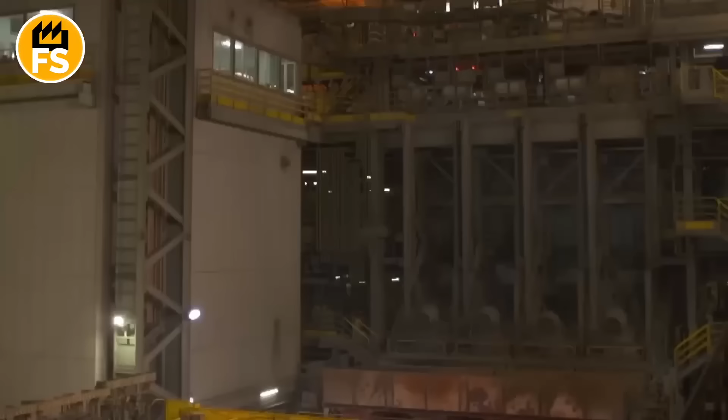They are heated in furnaces to 2,200 degrees Fahrenheit until the steel becomes malleable, almost like rubber. Then these red-hot billets are passed through rolling mills, turning them into long, thin rods with a diameter of approximately 0.25 inches. These are called wire rods.

These wire rods are then cooled under controlled conditions, either in air or in special baths, so that the metal structure is dense and the internal stress is uniform.

Next, a short storage stage. The metal is weighed, checked for hardness, flexibility, and the presence of microcracks. Only after this is each coil sent to the main section, wire drawing, from which the future cables will be formed.

After the steel wire rods have been cooled and checked for quality, they proceed to the wire drawing workshop. This process transforms the thick rods into thin but incredibly strong wire, which will become the foundation for bridge cables.

Imagine a steel rod as thick as your finger, just off the billet. Its surface is rough, as if covered in a layer of sand or rust. This is scale, a hard and brittle crust that appears during hot rolling.

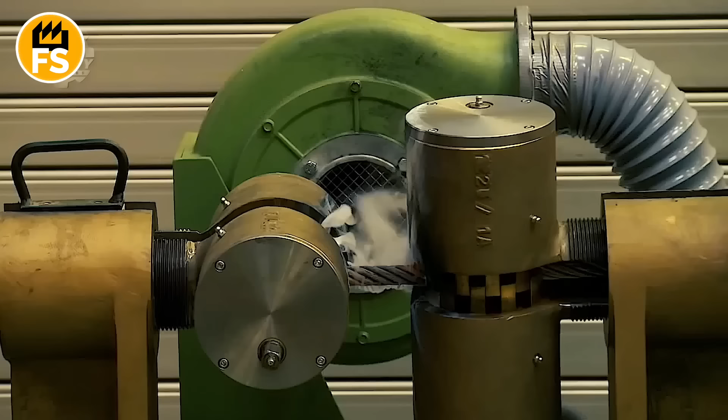To prevent it from interfering with further metal processing, it needs to be removed. To do this, the wire rod is first lowered into a bath of acid solution, usually sulfuric or hydrochloric acid. In this solution, the scale seems to flake off the metal, just like old paint peels off after being treated with solvent. Then the wire is rinsed with a large amount of water under pressure to wash away all traces of acid and dirt. To the touch after this, the metal becomes smooth and cool, like a freshly polished stone.

But that's not enough. Next, the wire goes through degreasing. It's submerged in special alkaline solutions that remove any oils that might have gotten onto the surface. Only then is the clean, smooth wire, shiny and dry, ready for the next stage, drawing.

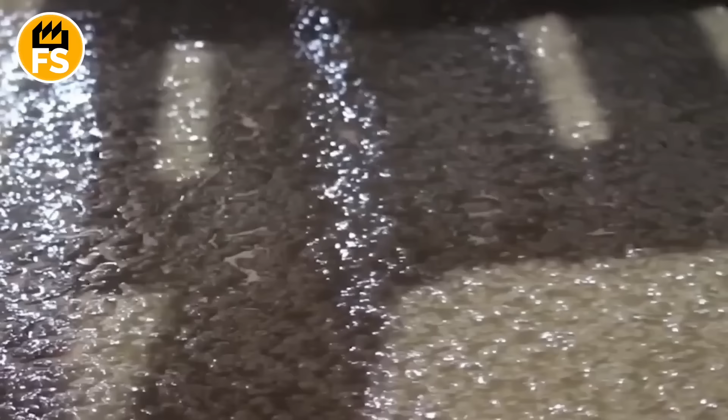Now, the wire needs to be pulled through a hole smaller than the wire itself, to stretch it out and make it thinner. But a thick end simply won't fit through. So, it's first sharpened. This process is called pointing.

The wire is fixed in a special mechanism that resembles strong metal vice jaws. One end of it is inserted into a device similar to a small press or crusher, where the steel casing is gradually squeezed and stretched into a cone shape. This way, the wire is essentially machined into a pointed tip. Imagine a pencil sharpened at one end, only it's not graphite but cold, shiny metal.

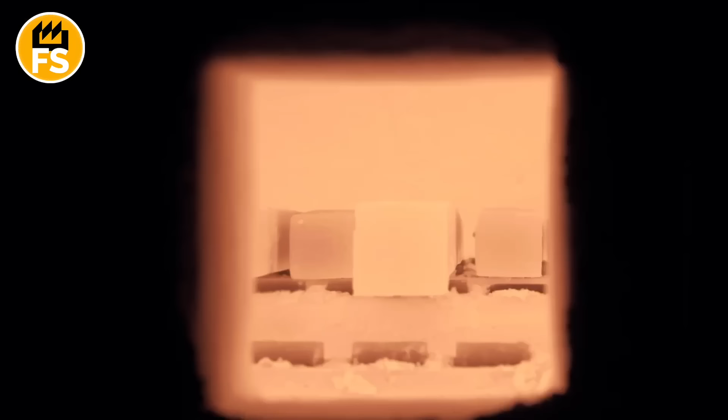This sharpened end then easily fits into the first opening of the drawing machine, a small metal die. To the touch, such a sharpened part becomes thin, like a shoelace, but remains elastic and strong. This is where the drawing process begins, which will turn the rough wire rod into a thin steel wire for the cable.

Picture a shining metal strand, about the thickness of a pencil, being gradually pulled through a series of metal rings. Each of these rings is a drawing die, looking like a coin with a hole in the middle, but made of super hard material, like tungsten carbide. The holes in each die are slightly smaller than the previous ones.

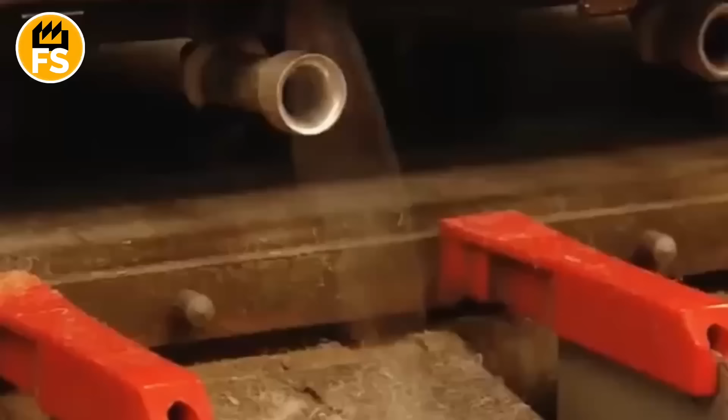The whole system is arranged in a line, like beads on a thread. The wire passes through the first ring, and it compresses it, stretches it, reducing its diameter. Next, the following ring, even smaller, and the same thing happens again. The entire wire is pulled by a powerful drawing machine resembling giant toothed rollers or high traction rollers. It constantly pulls the wire forward, maintaining tension and forcing it to pass through the dies.

To the touch, after several passes, the wire becomes thinner and longer, like a silvery strand of hair. The surface is smooth, cool, with a clear metallic sheen. Importantly, this entire process happens without heating. The metal remains cold. That's why it's called cold drawing. The steel gets stronger in the process. Its structure becomes denser and more durable, like a muscle that's been trained.

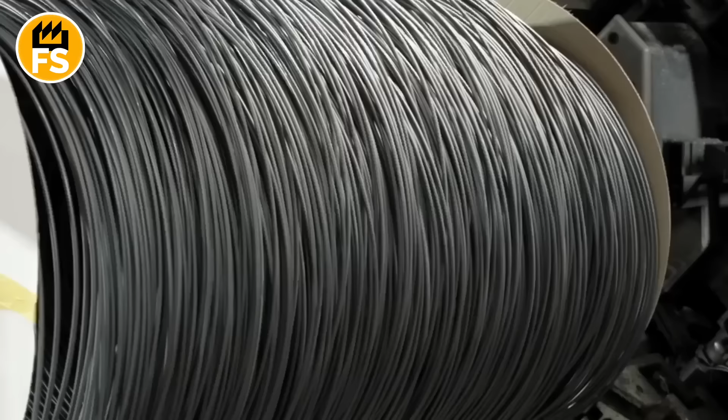And so, ring after ring, an ordinary wire rod transforms into a high-precision wire for a future steel cable. The steel thread that has just passed through a series of drawing dies has become thinner and stronger, but at the same time stressed, like a stretched string, with fatigue hidden inside. The metal has accumulated internal stresses, microscopic defects that reduce its ability to bend or stretch further without cracking. Yes, this wire has become brittle.

To release this stress, the wire passes through a special thermal furnace. It's not visible from the outside. It's a long metal tunnel structure, inside which the temperature reaches over 1,000 degrees Fahrenheit. In such heat, resembling the middle of a bonfire, the wire slowly moves through the furnace, either lying on moving rollers or suspended. It gradually heats up to the required temperature and then slowly cools down.

The whole process takes anywhere from a few minutes to an hour, depending on the thickness and grade of the steel. To the touch, the wire after this stage is just as smooth and shiny, but it no longer breaks. Inside the metal, its crystalline structure has rearranged itself. The stresses are relieved, plasticity is restored. Now it's ready for the next series of drawings, and it will become even thinner, stronger, and more durable. It's like giving muscles time to recover before a new workout.

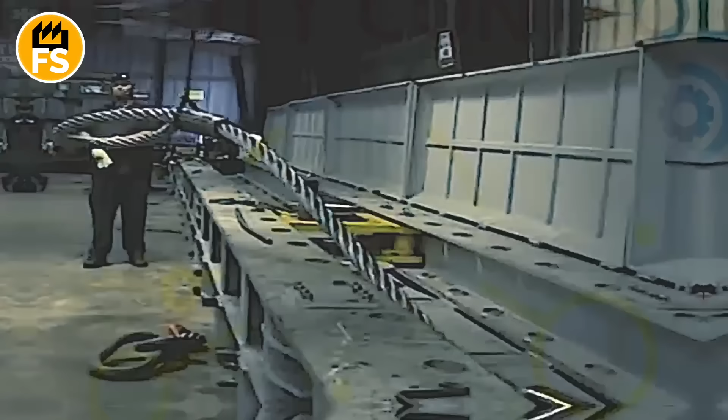In the final stage, the wire undergoes a final quality control, and this is definitely not a simple visual check. A long, almost continuous strand of shiny metal moves at a speed of tens of feet per second through the inspection unit. There, it's met by special sensors. This could be laser equipment that non-contact measures the wire's diameter with an accuracy of thousandths of an inch.

Nearby, devices that determine strength. A portion of the batch is selected for mechanical testing. The wire is clamped in hydraulic jaws and pulled until it breaks. This determines its tensile strength and breaking load. If the wire holds up, it's ready for work at heights of hundreds of feet, supporting the weight of a car bridge. The surface is checked separately for microcracks, burrs, corrosion.

High-resolution cameras or even eddy current testing are used here, which can see beneath the top layer of metal. And only the wire that has passed all these tests gets the green light. It will become part of a steel cable, capable of withstanding years of loads and harsh weather. This is the final touch that guarantees what arrives at the construction site is reliable, like steel itself.

After inspection, the quality wire is neatly wound onto large spools. The wire passes through guide rollers and tensioning mechanisms that ensure the coils lie tightly, but not too tightly. All this happens on high-speed winding machines. Spools come in different sizes. For thin wire, they might weigh hundreds of pounds. For thicker wire, a ton or more.

Then these spools head to the next stage, the actual twisting into cables. But even before this, they are sometimes coated with an anti-corrosive compound or lubricant so the wire isn't damaged during storage and transport. Spools of wire are usually moved using forklifts, cranes, or special carts because the weight of even one spool can reach several hundred pounds or more. Manual labor is ruled out here. Otherwise, the risk of injury would be too high.